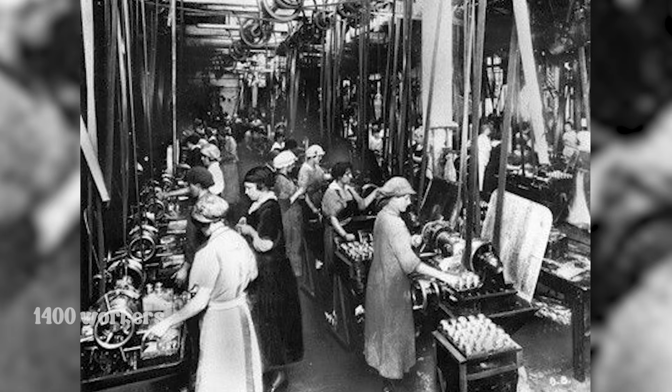By 1896, the National Sewing Machine Company employed nearly 1,400 workers on 20 acres in Belvidere, Illinois. They called it the second largest sewing machine factory in the world. Their cast iron machines sat in American parlors from coast to coast, sold through Macy's, Montgomery Ward, and Marshall Field, most of them wearing someone else's name.

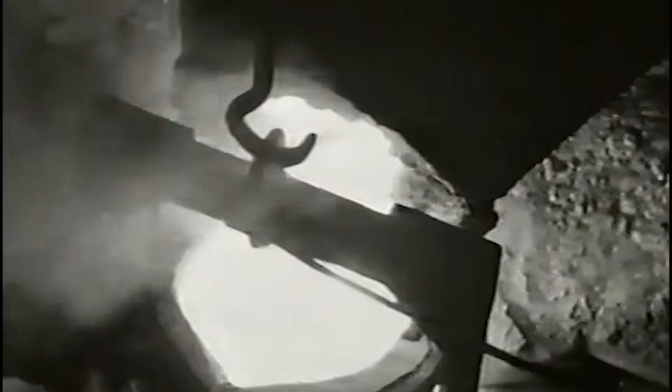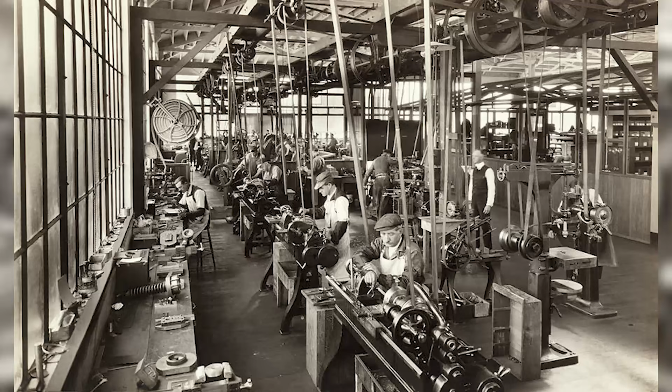Then the market changed shape, a portable that couldn't match Singer's featherweight. Japanese imports that multiplied sevenfold in 4 years, a defensive merger in 1953 that bought time but not a future. That same year, the Belvidere plant went silent. The last building came down in 2021. What survives is a foundry ladle outside a county museum, and the machines, thousands of them, still sewing straight seams a century after the hands that built them went still.

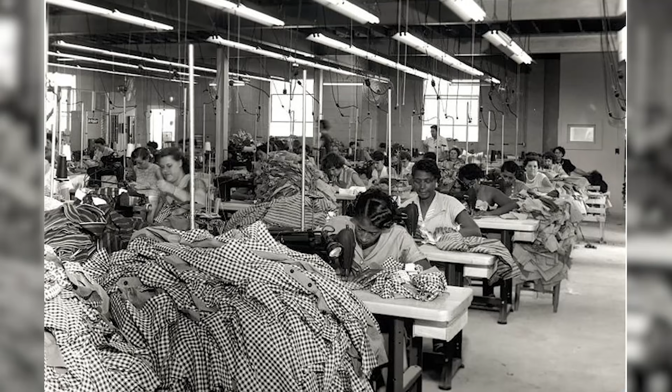This is the story of how Barnabas Eldredge built an empire from a river town, how 60 years of fine workmanship wasn't enough when the world decided it wanted something lighter and cheaper, and how a factory that made things meant to last forever didn't last as long as the things it made.

The story starts where the Kishwaukee meets the railroad in a northern Illinois river town that didn't yet know what it was about to become. Belvidere in the early 1880s was a county seat and not much more. A courthouse, a handful of merchants, farmland spreading flat in every direction. The kind of place where ambition went to sleep or moved on to Chicago. Good soil, good river. Not much reason for anyone beyond the county line to remember its name.

Then a man named F.T. June showed up with a factory. June ran a sewing machine operation, and in 1886 he moved the whole thing to Belvidere. The reasons were practical. Rail access on the Galena and Chicago Union Line, cheaper land than he'd find in any city east of the Mississippi, a river for power and process water, and a town hungry enough to welcome an industrialist with terms that made the relocation worth his trouble.

Belvidere wanted industry the way a farmer wants rain, and June was offering it. Not as a promise, but as a physical fact. Crated machinery arriving by rail, construction crews breaking ground, jobs materializing in a place where the alternative was the plow or the counter of a general store.

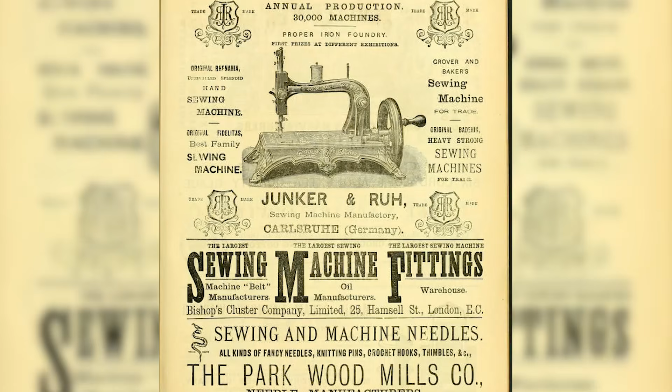What June couldn't have known, what nobody in Belvidere could have predicted, was that his decision to relocate a single manufacturing concern to this quiet bend in the Kishwaukee would rewrite the town's identity for the next 7 decades. That a factory built to produce sewing machines would eventually sprawl across 20 acres, employ thousands, branch into bicycles and washing machines and automobiles and toys, and become so deeply embedded in the civic life of Boone County that Belvidere without National would be a sentence missing its verb.

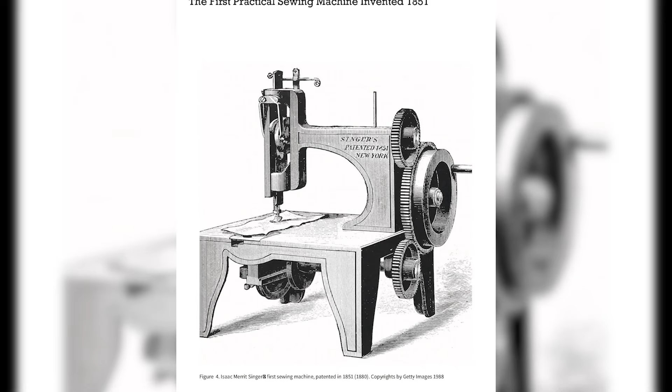The plant went up fast. June Manufacturing wasn't building something delicate. These were cast iron sewing machines, heavy as anvils, engineered to outlast the families who bought them. The operation needed a foundry to pour the iron, a machine shop to finish it, a pattern shop to carve the wooden forms the molds were made from, and assembly space to put it all together.

It needed men who could handle molten metal and women who could thread a bobbin mechanism with steady hands. And it needed them by the hundreds. Within a few years of June's arrival, Belvidere had something it had never had before. A factory whistle that told the town what time it was. Not the church bell. Not the courthouse clock. The whistle. That shift in authority, from civic time to industrial time, was the first sign of what Belvidere was becoming.

June Manufacturing was building for the American parlor, but the work itself was industrial. Heavy, hot, physical. The foundry poured iron. The machine shop shook with the vibration of lathes cutting metal. And outside the factory walls, Belvidere started changing shape.

Boarding houses went up for single men who'd come looking for work. A grocer expanded to serve the families forming around the plant. The saloon nearest the factory gate did its best business at shift change. None of this had existed before June's train pulled into the station. All of it grew because a man with a sewing machine factory decided this stretch of the Kishwaukee was the right place to build. But June's ambition, real as it was, would be dwarfed by what came next.

Because in 1890, a man arrived who didn't just want to run a sewing machine company. He wanted to build an empire. His name was Barnabas Eldredge. Eldredge wasn't a tinkerer. He wasn't some garage inventor nursing a single patent and a dream.

He was a consolidator, a man who looked at the American sewing machine industry in the late 19th century and saw not dozens of competing firms, but the raw material for something larger. And in 1890 he made his move.

The sewing machine business in the 1880s was a brawl. Singer dominated, Wheeler and Wilson held ground, and dozens of smaller firms scattered across New England and the mid-Atlantic fought for whatever market share was left, many producing machines that looked suspiciously like each other, most destined to disappear within a generation. The industry's first explosive decade, the 1850s and 1860s, when the sewing machine transformed from curiosity to necessity, had created a gold rush of manufacturers. By the 1880s, the rush was over.

What remained was a consolidation waiting to happen, and Eldredge intended to be the man holding the pieces when the dust settled. His instrument was the National Sewing Machine Company. In 1890, he consolidated June's Belvidere operation into National, folding the existing plant, its workforce, and its product line into a corporate structure with broader reach and deeper pockets than June alone could have managed.

The Eldredge name didn't replace June's overnight. It grew around it. The June machines kept coming off the line, but now they carried a new ambition behind them. Not just to survive in the sewing machine market, but to dominate it from a base that most of the Eastern establishment hadn't taken seriously.

What Eldredge understood, and what separated him from a dozen other ambitious men in the same industry, was that the sewing machine wasn't just a product. It was a piece of infrastructure.

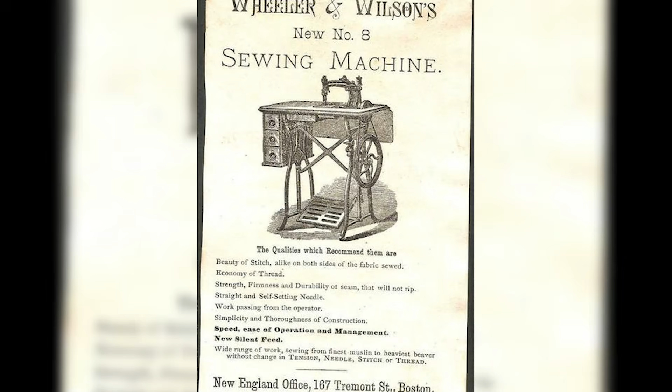Later came the Vindex line, cast iron toys that would become some of the most collectible American toy artifacts of the 20th century, miniature tractors, toy stoves, model cars, all produced in the same Belvidere foundry that cast sewing machine beds, using the same sand mold techniques and the same finishing processes. The Vindex name appeared on the toys, not the National name, but the iron was the same iron and the hands were the same hands. It was diversification that never left the building, and the capability was extraordinary.

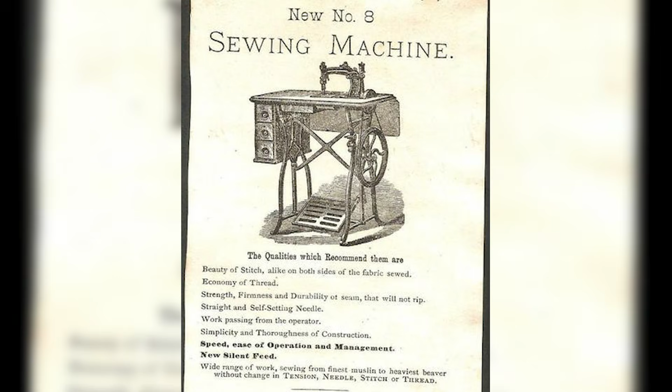The Belvidere campus by the turn of the century sprawled across blocks, a riverfront industrial complex that sat in intimate relationship with the town's commercial center. The foundry handled the full cycle, pattern making, mold preparation, the pour, rough finishing, and fed castings to the machine shop where lathes and drill presses and grinding wheels turned rough iron into precision parts. A steam plant drove the works. Rail sidings connected the shipping department directly to the main line. The whole campus functioned as a single integrated organism, raw materials entering at one end and finished products leaving at the other, the river running alongside it all like a pulse.

On the sewing machine side, still the core, still the business that paid the bills and justified the scale, National's engineers weren't standing still. The 1910 Rotary Model A introduced automatic thread tension, a feature that sounds minor until you've spent an afternoon fighting a bobbin that won't cooperate. Automatic tension meant a seamstress could switch from cotton to denim without stopping to adjust the machine, and it sold. It sold to individual buyers walking into hardware stores, and more importantly, it sold to the department stores that were becoming National's most powerful distribution channel.

This was the quiet revolution inside National's rise: the private label business. Eldredge didn't just sell machines stamped with his own name, he sold them stamped with everyone else's. Macy's carried National-built machines with the Macy's label on the cabinet. Marshall Field did the same.

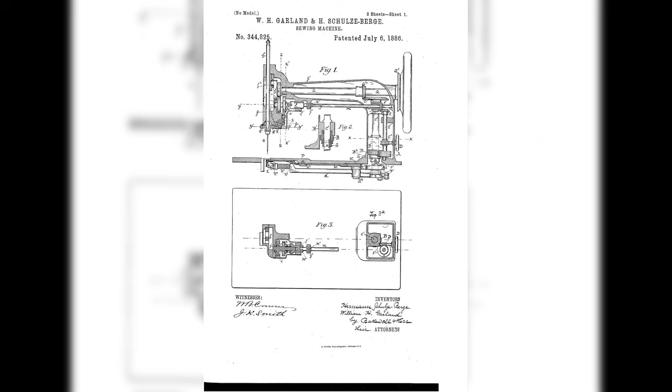The assembly floor brought the pieces together. The cast body from the foundry, the needle bar mechanism from the machine shop, the bobbin assembly, the hand wheel or electric motor, the tension system that Belvidere engineers had spent decades perfecting. Each machine moved through stations, each station adding a component, each worker performing a task they'd done so many times the motion lived in their muscles more than their conscious minds.

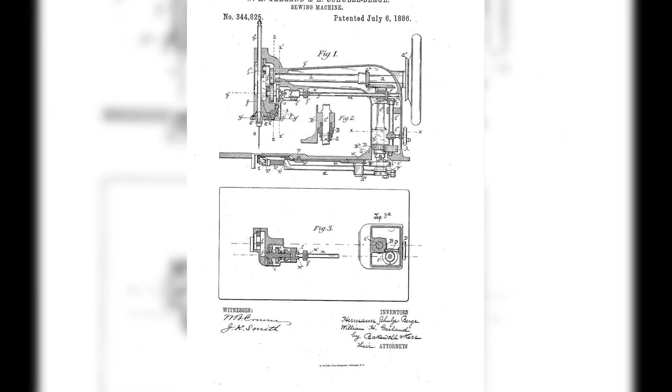By the end of that line, a collection of iron, steel, springs, and thread had become something a woman could sit down in front of, press her foot to the treadle, or flip the electric switch, and use to clothe her family. There was pride in that transformation, real pride.

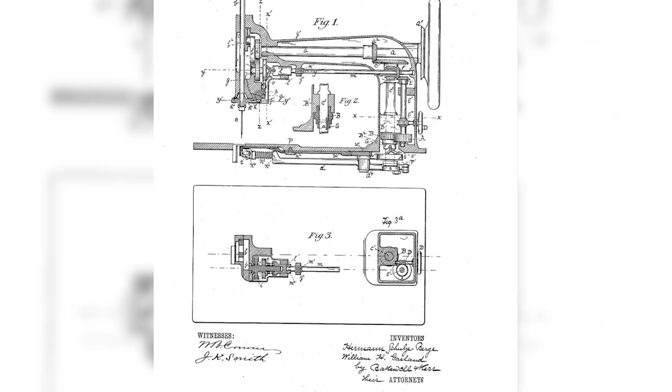You could pour iron, and that was skilled work. You could machine it to a ten-thousandth, and that was skilled work. But turning all of it into a device that put a straight, even seam through cotton or wool or denim, that was the trick. That was what National sold, and that was what Belvidere made.

The smell of the place layered like the work itself. Foundry smoke first, metallic and faintly sulfurous. The smell of iron, remembering it used to be ore.

Then machine oil, heavier and sweeter, coating every surface in the shop until the floors themselves became dark and slick with decades of it. Cutting fluid from the lathes, sharp enough to sting your nose from 20 feet. Lacquer from the Japanning ovens, an acrid sweetness that clung to your clothes and followed you home.

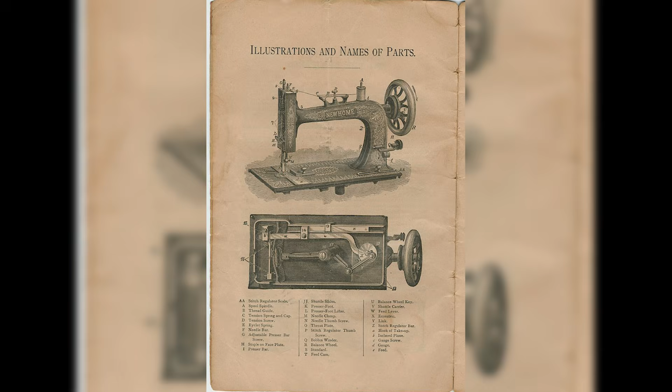And underneath all of it, the particular warmth of a building that had been running for half a century. Old wood, old brick, the accumulated heat of ten thousand shifts soaked into the walls and beams like memory stored in bone. Harold D. Neff worked those floors.

His name appears in the company's engineering records, one of the men who translated Belvidere's foundry tradition into the mechanical precision the post-war market would demand.

Men like Neff didn't just assemble machines. They understood them, why a particular cam profile produced a smoother stitch cycle, why one bearing alloy held its edge longer under sustained use, why the relationship between needle speed and fabric feed determined whether a seam held strong or puckered. That knowledge lived in their hands as much as in any blueprint, passed from senior man to apprentice the way farmers pass knowledge of soil, through proximity, repetition, and years.

It's the kind of knowledge that can't be written down completely and can't be replaced by a manual. It walks out the gate on the last shift and doesn't come back.

But in the late 1930s, nobody was thinking about last shifts. The Belvidere Works was the beating center of a town that had organized its entire economic life around this campus.

The morning shift arrived on foot, most of them, walking the same streets their fathers had walked, passing the same houses the company's wages had built.

The lunchtime whistle sent men streaming into the diners along State Street or into the plant cafeteria, where the coffee was strong and the conversation was about the work. The pour that went wrong, the order that was running late, the new jig someone had built to speed up a finishing operation.

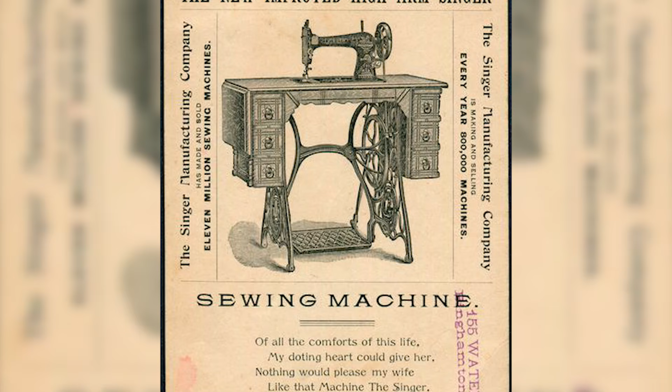National didn't supply one department store. It supplied the biggest names in American retail: Macy's, Marshall Field, Wanamaker's, Montgomery Ward, each one stamping its own brand on a Belvidere machine. The same foundry poured iron for all of them. The same machinists drilled the same mounting holes. The same assembly workers fitted the same bobbin mechanisms with the same careful hands. The only thing that changed between a Macy's machine and a Ward's machine was the decal on the arm and the nameplate on the cabinet.

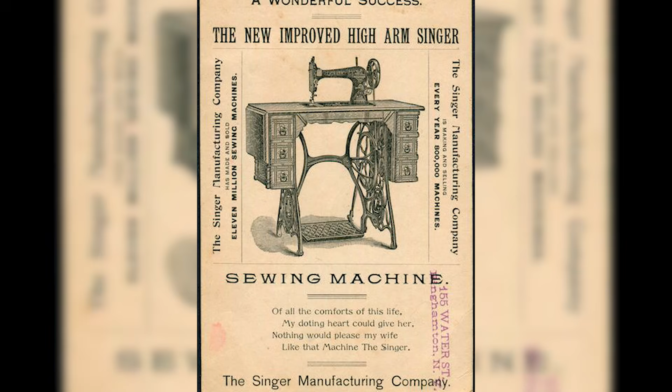National was the ghost in the American sewing room, present in millions of homes, recognized in almost none. Inside Belvidere, though, there was nothing invisible about it. The factory complex occupied roughly 5 blocks by the early 20th century, a riverfront campus that sat so close to downtown you could walk from the plant gate to the courthouse in 10 minutes.

Workers didn't commute from distant suburbs or drive highways to industrial parks. They walked. Many of them lived within sight of the smokestacks. The plant was the town, and the town was the plant, and the money that moved from National's payroll window to the shops on State Street and back again was the circulation that kept the whole organism alive.

Payday meant something in Belvidere the way it meant something in every factory town in America. It meant the grocer restocked his shelves, the barber stayed busy, the taverns filled on Friday nights with men whose hands were still dark with machine oil and cutting fluid, who ordered beers with the particular satisfaction of people who'd made something with weight that day.

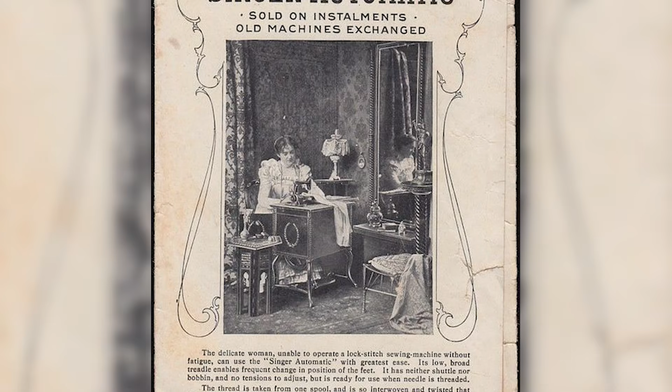The bowling leagues were full. The churches were full. The schools were full of children who assumed, without anyone needing to say it, that the factory that employed their father would employ them too when the time came. That assumption, that the work would be there, that the gates would stay open, that making things in Belvidere was permanent, was the invisible infrastructure underneath everything else, more load-bearing than the foundry walls.

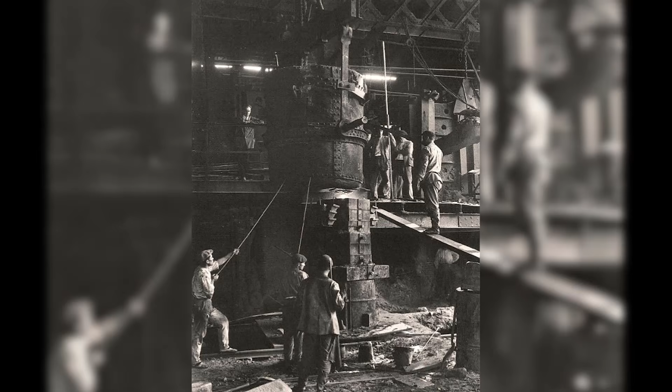And National made more than sewing machines. The Vindex line, cast iron toys produced in the same foundry, turned out miniature tractors, toy stoves, dollhouse furniture, all poured from the same iron and finished with the same care as the machines that paid the real bills. Vindex wasn't a separate company. It was a National product line, a sideline that used spare foundry capacity to make playthings for American children.

A kid in 1930 could sit on the floor playing with a cast iron Vindex tractor while his mother sewed a dress on a machine that came from the same building. The same pour, the same workers.

The scale of what National made for Belvidere is hard to overstate. The Boone County Museum still preserves a 1904 Eldredge runabout, that brass-era automobile built by a sewing machine company, as evidence of a time when a single Belvidere factory believed it could turn its hand to nearly anything and expect to succeed.

By the time the company published its 1939 catalog, it had settled into a phrase that captured everything it wanted the world to believe about itself: 60 years of fine workmanship. The Smithsonian would later archive that catalog as an artifact of American trade literature, a period document that radiates the confidence of a company that had made things for 6 decades and fully expected to make them for 6 more.

The machines in those pages gleamed. The cabinets were handsome. The features, automatic tension, reverse stitching, integrated electric lighting, were modern. And the language was the language of a concern that believed its own story, that workmanship mattered, that permanence had value, that a machine built to last was worth more than a machine built to sell.

They were right about the machines. The machines were magnificent. What they couldn't see, standing at the summit of 60 years, looking out over a market they'd helped to build, was that the ground underneath them was already beginning to shift. In 1939, National's engineers unveiled an aluminum portable sewing machine.

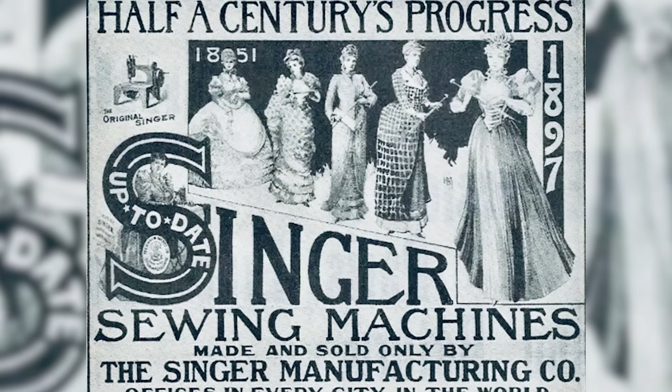And in the American living room, something subtler was shifting. The relationship between a woman and her sewing machine was beginning a slow evolution, from necessity to choice, from essential household infrastructure to a hobby, from something you needed to something you might want. The market National had been built to serve was changing shape, and the company's greatest strengths, the heavy iron, the foundry tradition, the 60 years of workmanship, were about to become, in the coldest possible accounting, liabilities.

National, in 1939, was strong. Its machines were built to last generations. Its workforce was skilled and experienced. Its factory was a physical monument to American manufacturing at its most self-assured, 20 acres of capability, rooted to the banks of the Kishwaukee, connected by rail to every market that mattered. Everything about the company suggested permanence.

That was the summit, the highest point. The view from the top of 60 years of fine workmanship, looking out over a landscape that was about to become unrecognizable. They just didn't know it yet.

The war changed everything, but not all at once. When the fighting ended in 1945, the American sewing machine industry looked, on the surface, like it had looked before. Singer was still Singer. National was still shipping machines from Belvidere. The department stores were still ordering.

The foundry was still pouring iron. If you'd walked the floor of the Belvidere Works in 1946, you'd have heard the same sounds, smelled the same layered mixture of machine oil and cutting fluid and lacquer, watched the same process, raw iron in, finished machines out, that had been running since Barnabas Eldredge consolidated the place in 1890. More than half a century of continuous operation. The rhythm hadn't broken.

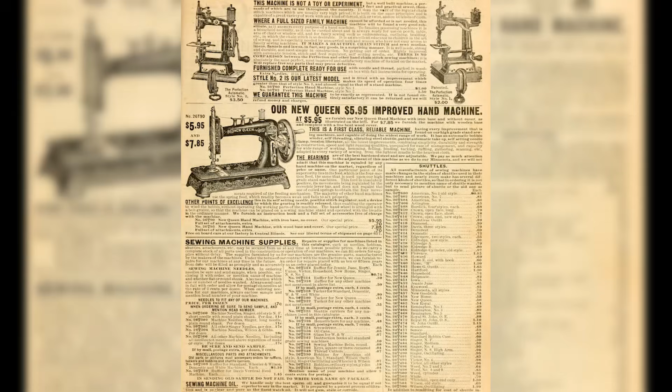A company with a strong consumer brand can absorb price pressure by relying on loyalty, customers who will pay a premium because they trust the name. National had no such loyalty to draw on. Its customers were department stores, and department stores are loyal to their own margins, not to their suppliers. If Ward's could source a comparable machine from Japan for less money, Ward's would source a comparable machine from Japan for less money. That wasn't betrayal. That was retail. And National, having built its entire business around serving retail buyers rather than end consumers, had no defense against the arithmetic. National was built for a world that was ending.

And the men running the company in Belvidere, whose names the public record has largely failed to preserve, were about to discover that 60 years of fine workmanship wouldn't buy them the time they needed to build for a different one. The decisions that killed National didn't arrive as a single catastrophe. They accumulated, one on top of another, each one defensible in the moment it was made, each one narrowing the road a little further until there was no road left.

That's how industrial tragedies usually work. Not the sudden cliff, the long slope, taken one reasonable step at a time. The first decision wasn't really a decision at all. It was an inheritance, the accumulated weight of a business model that had been set in place decades earlier.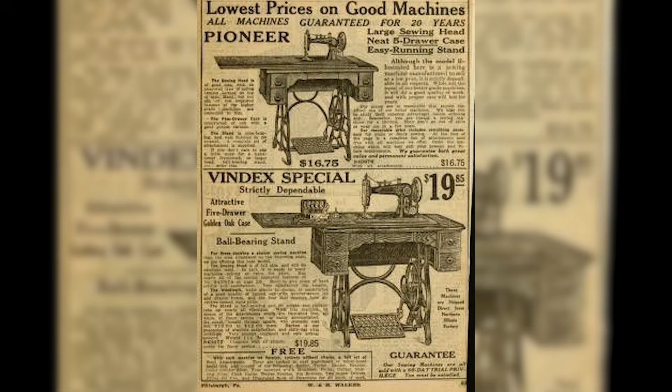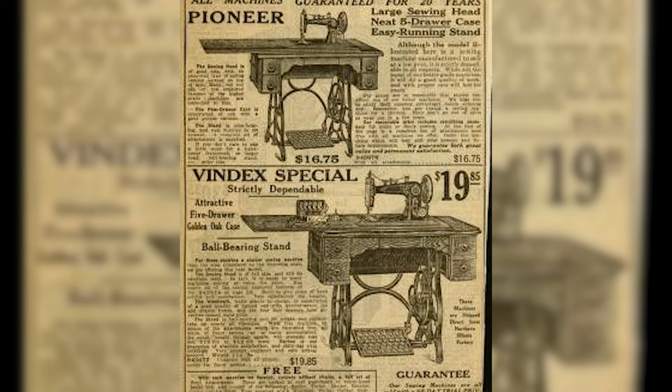National had built its entire distribution architecture around private label manufacturing, selling machines through department stores under other companies' names. That model had made Eldredge's fortune and filled the Belvidere works for the better part of half a century, but it had also created a dependency that functioned like a slow-acting poison. When the market tightened, National didn't have a consumer brand to defend. It had contracts, and contracts, unlike brands, can be renegotiated downward, can be shifted to a cheaper supplier, can be canceled with a letter and a handshake.

A brand, a name that means something to the woman standing in the store with her hand on her pocketbook, is harder to kill. National had spent 60 years building manufacturing capability instead of consumer identity. The capability was extraordinary. The identity was almost invisible. And you can't build identity in a crisis. You needed it before the crisis arrived, and it's too late to start when the Japanese machines are already on the shelf. The second decision was the failure to find a post-war product that could reset the company's position in the market.

National had tried. The aluminum portable of the late 1930s was a serious attempt to answer Singer's featherweight, to give National a branded flagship product that buyers would ask for by name rather than accept as someone else's label. It didn't work. The machine was competent but not compelling, and it arrived in a market where Singer's head start and brand recognition made competence insufficient. You had to be dramatically better or dramatically cheaper. National's portable was neither.

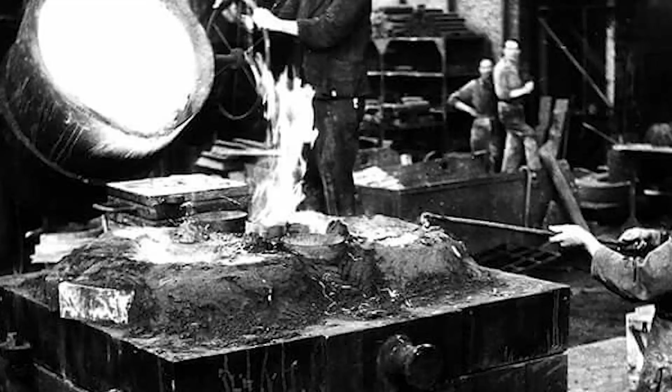And each option had a human cost that the strategy debates never fully captured. Retooling meant shutting down production lines while the new equipment went in. Shutting down lines meant laying off workers. Laying off workers in Belvidere didn't just mean unemployment checks and job searches.

It meant families whose entire economic existence was built on the assumption that the plant would be there tomorrow. Mortgages taken out on factory wages. Kids enrolled in schools funded by factory taxes. A whole social infrastructure that depended on the foundry pouring and the paychecks flowing.

The risk of doing nothing was slow decline. The risk of doing something was immediate disruption to the lives of people who had no say in the decision and no safety net if it went wrong.

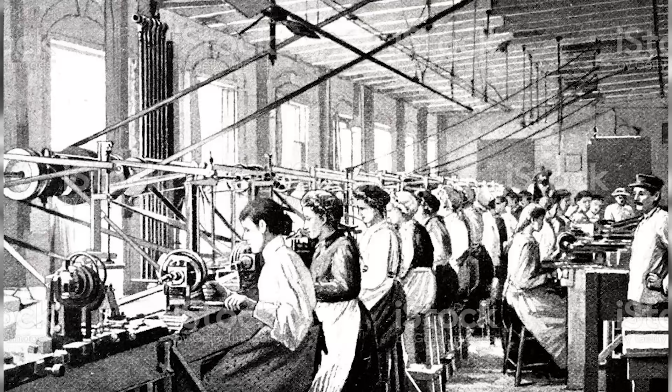The safest choice, quarter by quarter, was to keep doing what National had always done. And quarter by quarter, the safest choice moved the company closer to the edge. That's the particular tragedy of incremental decline.

Each individual decision looks reasonable. Each one can be defended with logic and data and the genuine desire not to make things worse for the people on the floor. The trajectory only becomes visible when you step back far enough to see the slope, and by then the slope has become a cliff.

The third decision, the one that carries a date, even if the individuals who signed the papers remain largely absent from the accessible public record, was the 1953 merger with Free Sewing Machine Company. The merger tells you everything you need to know about where National stood by the early 1950s.

Companies merge from positions of strength when they're buying growth. Companies merge from positions of weakness when they're buying time. This was the second kind.

Free Sewing Machine was not a powerhouse. It was another mid-tier American manufacturer squeezed by the same forces squeezing National: Japanese imports gaining shelf space month by month, shifting consumer preferences, shrinking the domestic market, the relentless arithmetic of a business where the price the customer would pay for a sewing machine was falling, while the cost of making one in an American foundry was not.

The merger was a lifeboat. Two companies, each taking on water separately, lashing themselves together in the hope that the combined vessel might stay afloat longer than either one alone.

What the merger couldn't fix was the thing that actually needed fixing. The problem wasn't that National was too small. The problem was that National's entire approach to making and selling sewing machines, the foundry process, the heavy castings, the private label distribution, the cost structure built on 60 years of accumulated overhead, was designed for a market that no longer existed in its previous form.

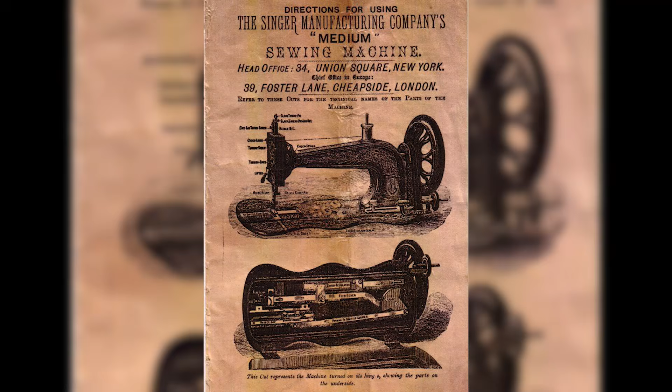The logic wasn't insane. Combined, National and Free had broader product lines, theoretically larger distribution networks, and the possibility of eliminating redundant operations to reduce overhead. On paper, the merger made the kind of sense that defensive mergers always make on paper: synergies, efficiencies, the arithmetic of consolidation that sounds clean in a boardroom presentation and turns messy on a factory floor.

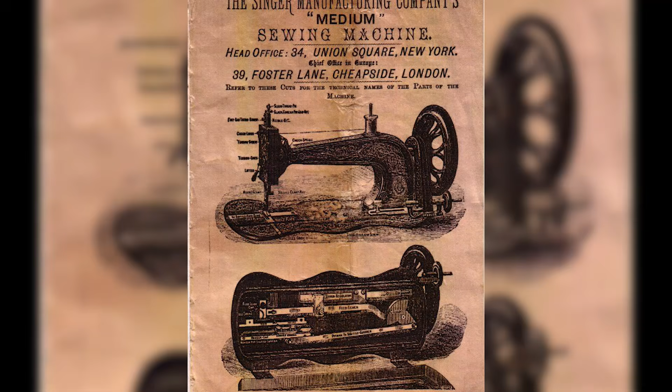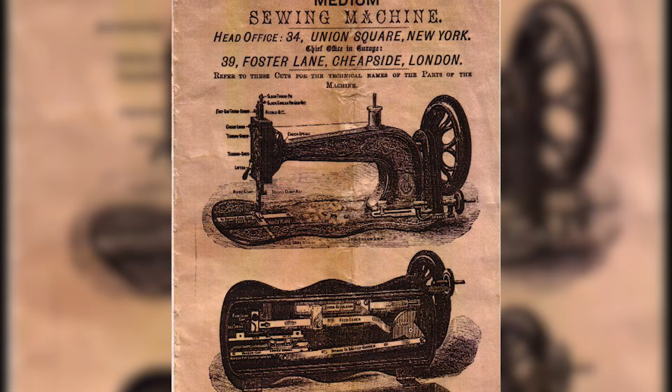But what the paper couldn't show was whether the fundamental problem was solvable by combination at all. Two companies that couldn't individually compete with Japanese imports on price weren't necessarily going to compete better together. The math of the merger addressed the cost structure. It didn't address the market, and the market was the problem.

Somewhere in Belvidere, a worker heard about the merger and tried to figure out what it meant for him. Was his job safer now or less safe? Were the orders going to increase, or was eliminating redundant operations a polite way of saying that some of the people who walked through these gates every morning wouldn't be walking through them much longer? The men on the floor didn't need an MBA to understand the arithmetic.

A merger between two struggling companies doesn't usually end with more jobs. It ends with fewer. The question was whose jobs and how soon, and whether the town that had built itself around this factory was about to discover what happened when the factory decided it needed fewer people than the town had raised to work there.

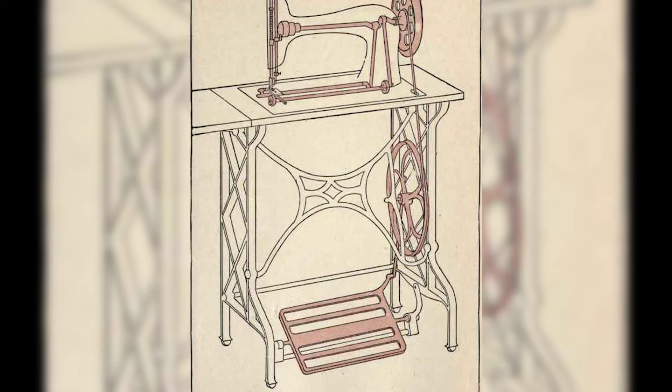Meanwhile, across the Pacific, the Japanese sewing machine industry continued to accelerate. Brother expanded its export operation. Other Japanese firms entered the American market with their own machines, their own price points, their own retail relationships. The machines kept getting better and cheaper, arriving in volumes unimaginable a decade earlier. The American sewing machine industry in the early 1950s was facing a version of what the American steel industry would face 20 years later, and the American auto industry 20 years after that. A reckoning with foreign competitors who had learned the game and were prepared to play it at a scale and cost the incumbents couldn't match without fundamentally reinventing themselves.

The fourth and final structural failure was the simplest to name and the hardest to overcome. National could not match the scale and price of Japanese production. This wasn't a failure of will or intelligence or dedication. It was economics. Japan's post-war sewing machine industry had been built from scratch with modern equipment, organized around modern production methods, and supported by a national industrial policy that actively encouraged export manufacturing.

National's Belvidere works had been built in 1886 and expanded piecemeal over six decades. The foundry techniques were proven but not modern. The labor was skilled but expensive by global standards. The overhead was the accumulated weight of half a century of infrastructure: buildings, equipment, pensions, utility bills, maintenance on a riverfront campus designed for an era when the American sewing machine market was a domestic contest among domestic producers. That era was over, and the cost of having built for it was now a burden that no merger, no product innovation, and no amount of fine workmanship could lift.

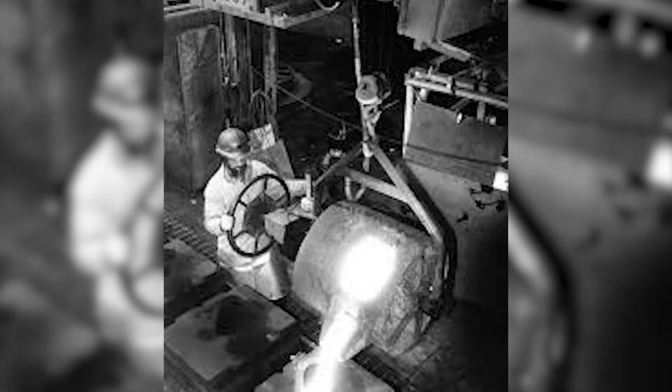Whatever National did between 1953 and 1957, it didn't do it on the banks of the Kishwaukee, with Belvidere workers, in the foundry where iron had poured, or the machine shop where castings had been finished. The town's story and the company's story, the same story since 1886, diverged in 1953 and never reconnected. In 1960, the New Home brand, part of National's corporate lineage reaching back to Horace Webster Hadley's Eastern sewing machine training before he headed west to Belvidere in 1891, was purchased by Janome, a Japanese company.

The symmetry was almost too precise to bear. The nation whose sewing machine exports had helped squeeze American manufacturers out of their own market now owned one of their names. The New Home brand would survive; Janome would build it into a global presence, appearing on machines sold in countries Barnabas Eldridge never shipped to. But the name would have nothing to do with Belvidere, the Kishwaukee, the foundry ladle, the Japanning shop, or the workers who'd walked those floors.

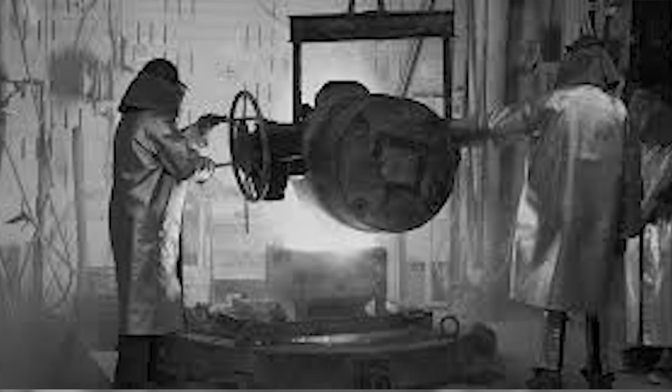The brand survived. The machines survived. Thousands of National sewing machines are still in use or in collections today, still capable of sewing a straight seam a century after they were cast and assembled in Boone County. The iron holds, the mechanism turns, the thing does what it was built to do. But the company that built them, the plant that made them, the town that depended on them, those didn't survive the way the machines did. The iron lasted longer than the enterprise that shaped it. The product outlasted everything except the memory of how it was made.

After National, the buildings found other uses the way abandoned industrial buildings always do, grudgingly, partially, with the slow indignity of a structure designed for one purpose being pressed into service for something smaller. The transition wasn't immediate. A factory campus that operated for six decades doesn't convert to new use overnight. There are environmental concerns, decades of foundry work leave their mark in the soil, there are ownership questions, maintenance costs, the basic problem of finding someone willing to take on a building designed to house a cupola furnace and a 100-ton overhead crane and repurpose it for something the modern economy actually wants.

Most of the campus simply sat, the buildings deteriorating. Buildings deteriorate when nobody maintains them, a slow leak here, a broken window there, weeds pushing through the loading dock, the particular neglect that comes when a building stops being someone's responsibility and becomes everyone's problem.

Leith Furniture eventually moved into part of the surviving complex. For decades, what had been a sewing machine factory became a furniture showroom. The foundry floor, where workers had poured molten iron at 2,000 degrees, became a place where couples browsed sofas. The machine shop, where Hadley and Neff had drilled mounting holes to thousandths of an inch, became warehouse space stacked with dining room sets and bedroom suites. The conversion was thorough enough to erase the building's original purpose from casual view. A customer shopping for a recliner wouldn't have known she was standing where a cupola furnace once burned. But the bones were still there underneath, the heavy timber, the thick brick walls, the massive floor plates designed to carry the weight of industrial machinery, not armchairs. Buildings remember what they were built for, even when the work stops.

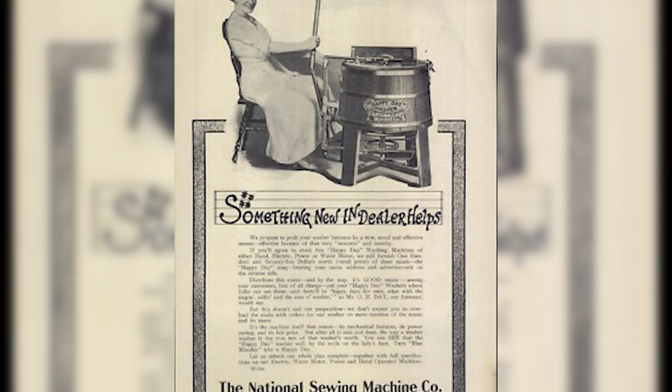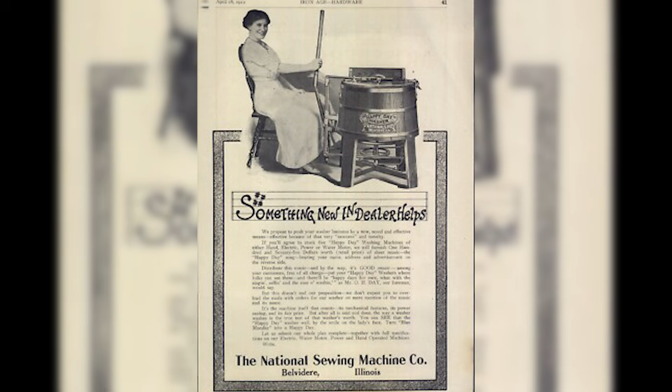But the building's condition told a bleaker story. The roof leaked, the mechanical systems were shot, environmental remediation was likely necessary. Consultants estimated demolition alone would cost approximately $1 million, and renovation would cost many times that. The math didn't work. It rarely does with buildings like these.

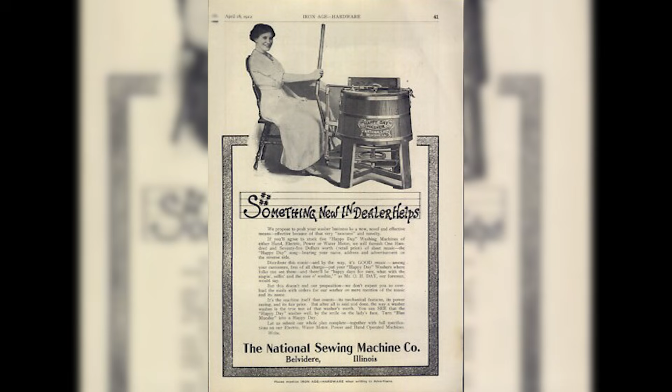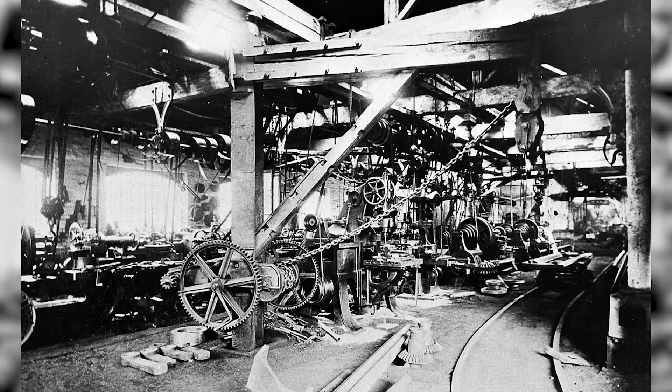The cost of saving what's left almost always exceeds what anyone is willing to pay for the privilege of having saved it. The final remnant came down in 2021, 135 years after F.T. June moved his sewing machine operation to a bend in the Kishwaukee River. The last physical trace of what he'd started was reduced to rubble and carted away. Belvidere's long industrial afterlife, the decades of secondary use, the gradual demolitions, the periodic hopes that someone would find a way to save the last building, was over.

What had taken 67 years to build and another 68 to fully erase was finally completely gone. What remains is smaller: the foundry ladle outside the museum, the Eldridge runabout inside it, still polished, still on display, still proof that a sewing machine company once had the confidence to build a car, a historical marker connecting the artifacts to the factory that made them, and the stories, thinner now, carried by fewer people each year, the first-hand accounts fading into second-hand memory, the way all living history eventually does.

A foundry ladle is a simple tool, a heavy vessel, open at the top, designed for one purpose: to carry liquid iron from the furnace to the mold. It has no moving parts, no precision mechanism, no engineering elegance. It is, if you want to be ungenerous about it, a bucket for metal that has been heated past the point of recognition. Its only virtues are that it holds the pour and survives the heat.

The ladle outside the Boone County Museum of History did both of those things for decades. It carried the iron that became sewing machines, bicycles, washing machine tubs, toy tractors, and parts for an automobile that a sewing machine company had the audacity to build. It carried the raw material of Belvidere's economic life from furnace to mold, pour after pour, shift after shift, year after year, until the furnace went cold and the molds were broken up, and the building that housed them came down around it.

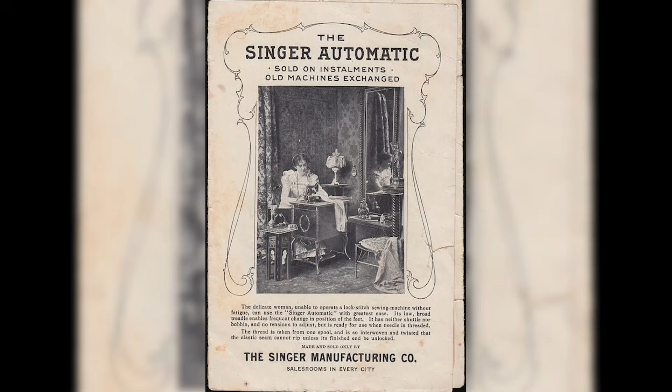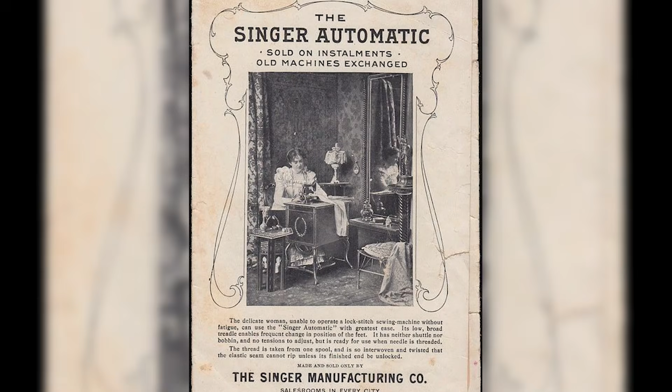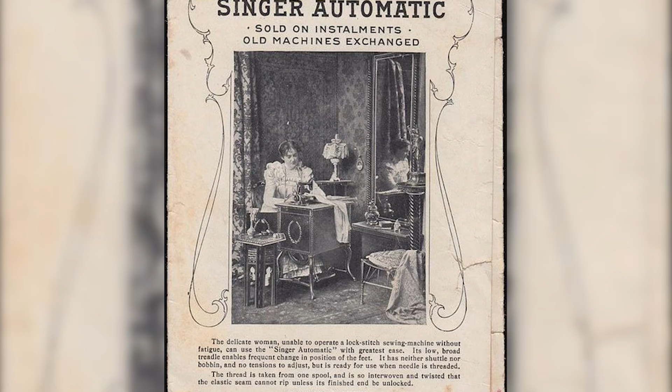Belvidere is still there, still a county seat, still on the river, still connected to the railroad that once carried crated sewing machines to every corner of the country. People still live there and work there and raise children there. But the factory that made the town's name recognizable beyond the county line, the 20 acres of foundry and machine shop and assembly floor, the employer that paid the wages, that built the houses, that filled the schools, that made Belvidere a place, and not just a dot on a map, exists now only in the museum and in the stories, and in a single cast iron ladle sitting in the open air, where the sound of the factory used to be.